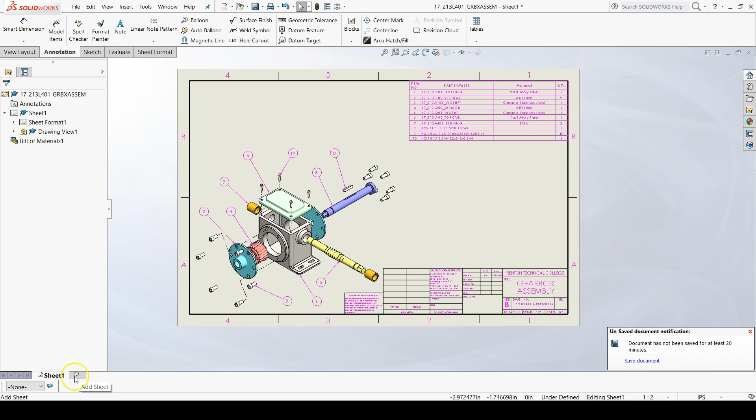Once you've done the isometric exploded view with the bill of materials and labeled everything with balloons, we can make a new sheet down here at the bottom. You say add sheet.

And then put some orthographic views of our gearbox assembly in. If you get something that looks like this, just click the refresh button to update the view palette.

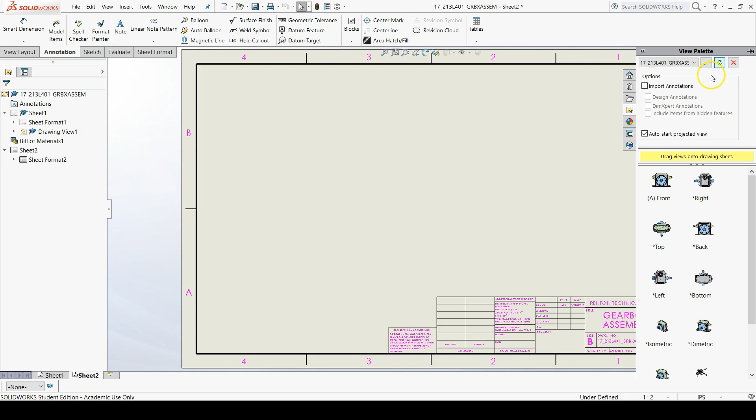Now you can throw your front view, top view, and right view into the drawing.

Now something that's very important to remember with assembly drawings is that it's very rare that you include hidden lines. So let's get rid of these hidden lines by choosing the Hidden Lines Removed display state.

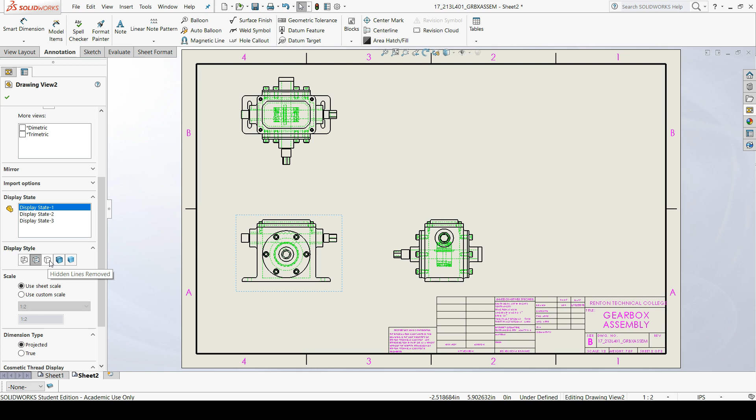Let's add a section view on the View Layout tab to the right view, going right through the middle.

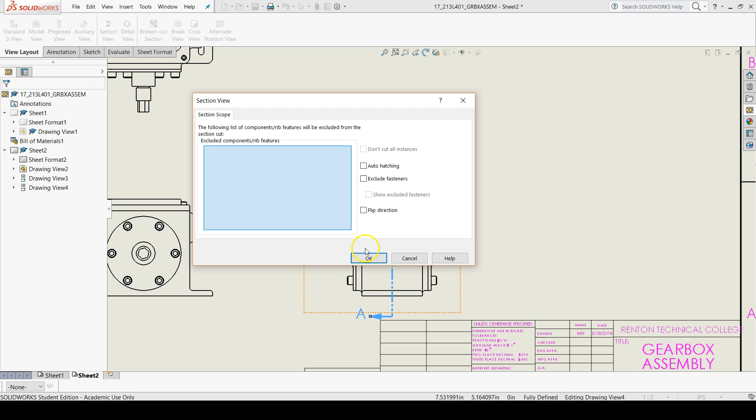Now, with assembly drawings, something comes up to where you can exclude components from the section view. We're going to want to do this in a bit, but right now we can't see all of the things that we want to exclude. So let's just make the section view first, and then we'll go back into this dialog box.

So I can move my section view over here. There's my section view icon. I'm going to move this up just a little bit. There we go.

And a couple things I'm going to do to this section view. I'm going to click in the view to get into the property manager, and I'm going to change the display style to shaded with edges.

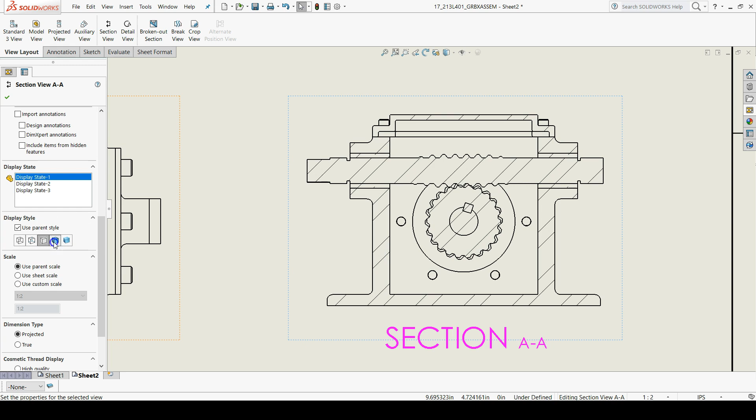I'm also going to right click in the view and then go to properties. In the properties dialog box, we can click on the section scope tab, and then now click on the worm shaft and the worm gear. We can confirm that those are our selections by looking at the name and say OK.

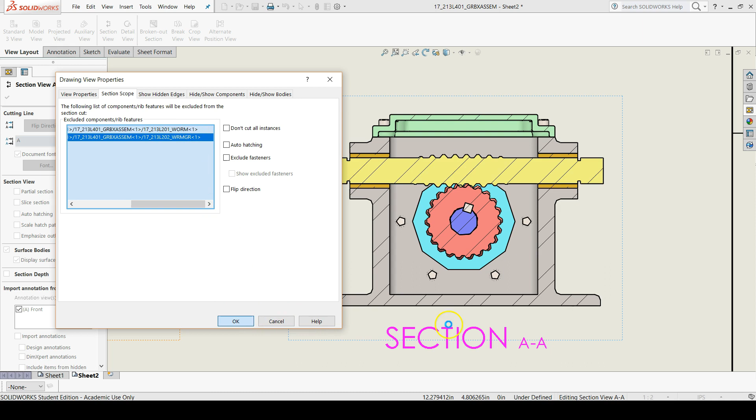And now those two components are not sectioned like the rest of the drawing. So one more thing you might notice is that this section view might look a little blotchy, a little hexagonal.

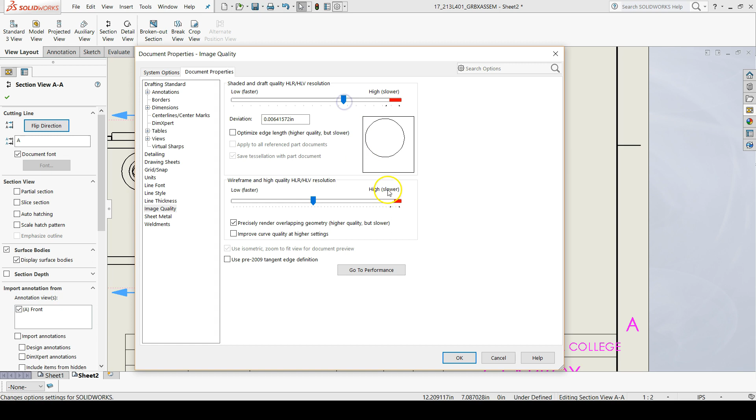So you can change the image quality of your section view by going up to Options, going to Document Properties, and then going to Image Quality. Bring this shaded and draft quality up to about 0.006 deviation. Press OK, and the image after loading should look a lot clearer.

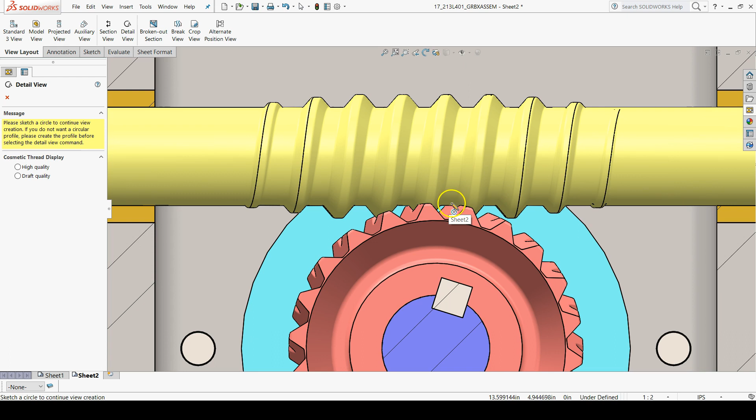Then we're going to add a detail view, which is also in the View Layout tab, right next to section view, of the gear interface. So I'm drawing my circle for my detail view, and there it is. For this, we want a 2:1 detail view.

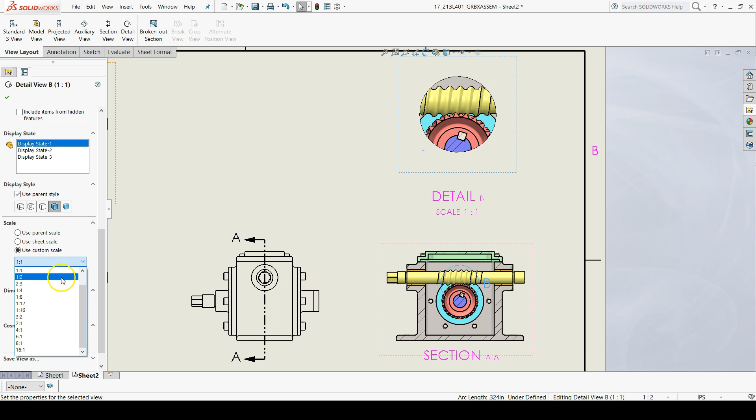By default, I think it's scaled 1:1. You can change this to scale by left-clicking inside the detail view, scrolling down in your property manager to the scale section, and then choosing 2:1. And hit confirm, and it's a lot bigger.

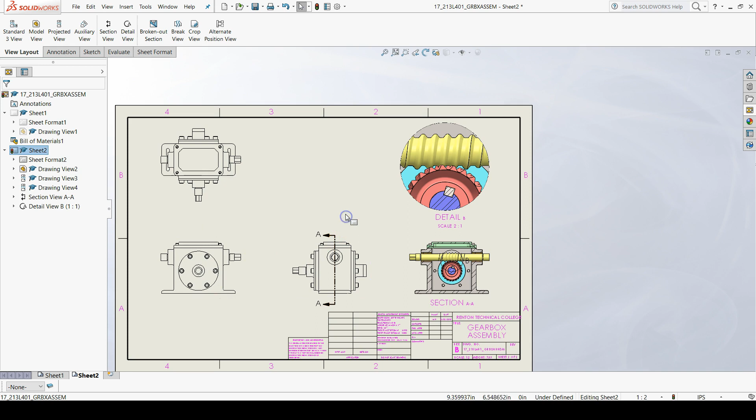I need to grab my detail view icon here. I'll move things around just a little bit, and then I want to put some dimensions on this thing that are only pertinent to the assembly of the gearbox. So to do that, I'm going to go to the Annotation tab and manually add in smart dimensions.

And you add these in just like on a regular detailed drawing. Don't worry if your dimensions look different than mine. I think... whoops, that was the wrong thing. Yeah, I did not want that. I wanted this one.

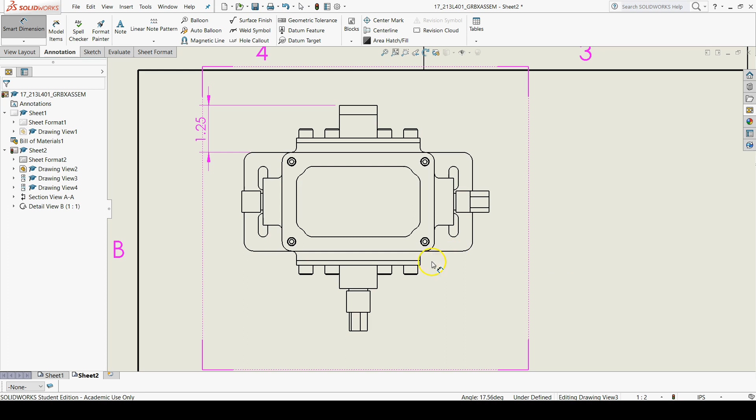But my drawing template is automatically in ANSI. That's why my dimensions are to the sides. We can also add center lines in the same way that we add all of our other center lines in detail drawings.

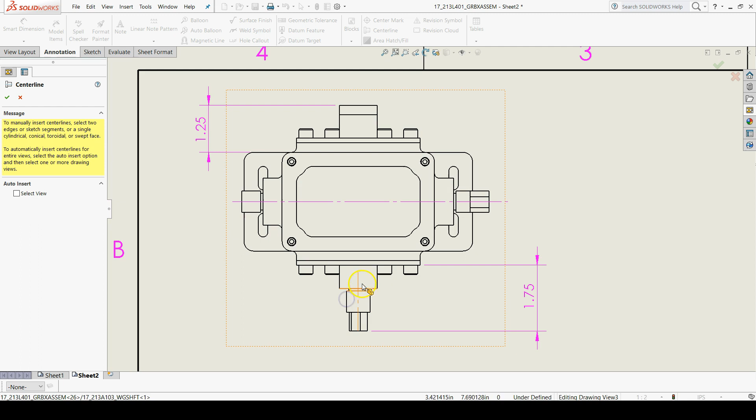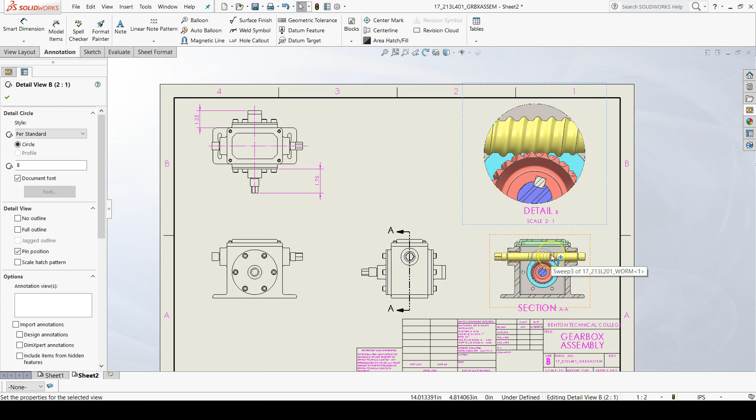And I'll leave the rest of the dimensions up to you, because I believe that is all we need. Wow, this scale is really big. I didn't think I drew it that big. I'm going to shrink it down just a little bit at the detail view level.

This is making my computer go really slow. Ugh, I can't remove it.

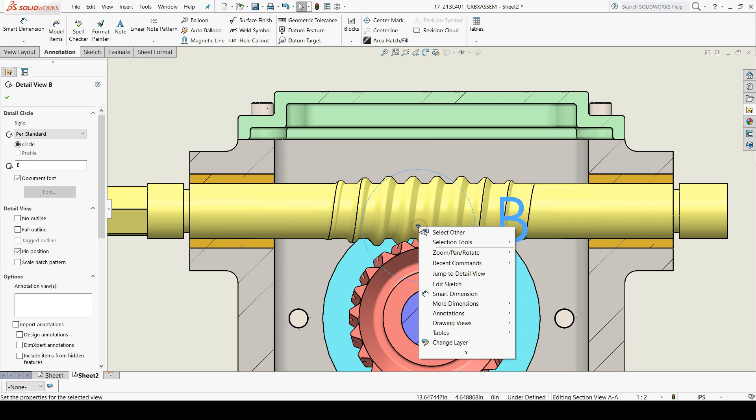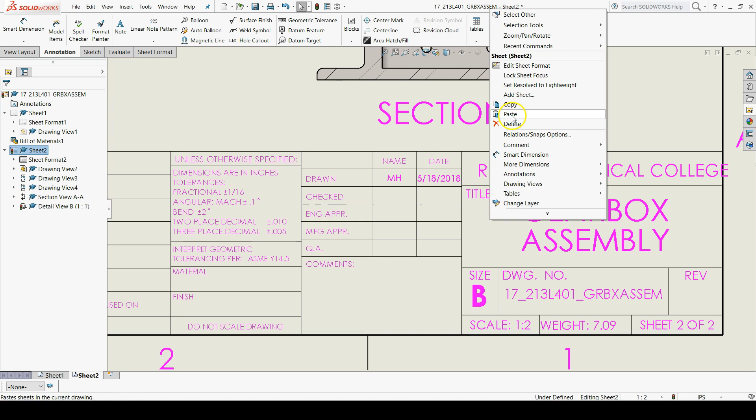That's a lot smaller. Also, don't forget to edit your border and title block. You can do that using custom properties in the assembly file and right-clicking to edit the sheet format.

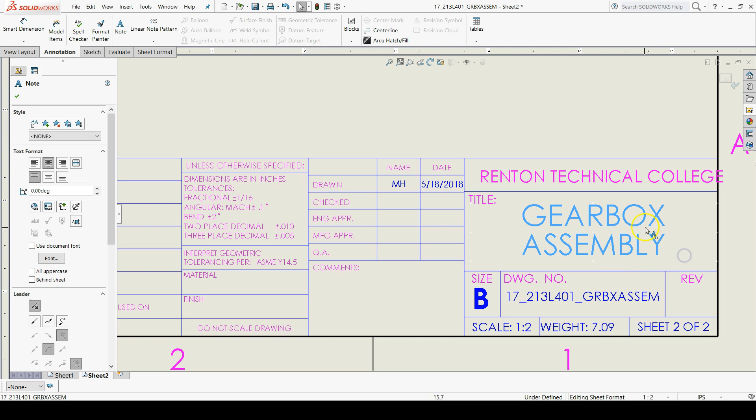Remember that there are boxes that are already in here that you can put custom properties in for, such as this one. I put in the title property in the Gearbox assembly, and I typed in the title into the assembly. Here, this is just the file name.

I have the weight here. Here I made a custom property for my initials, and then the date is attached to the drawing in custom property.

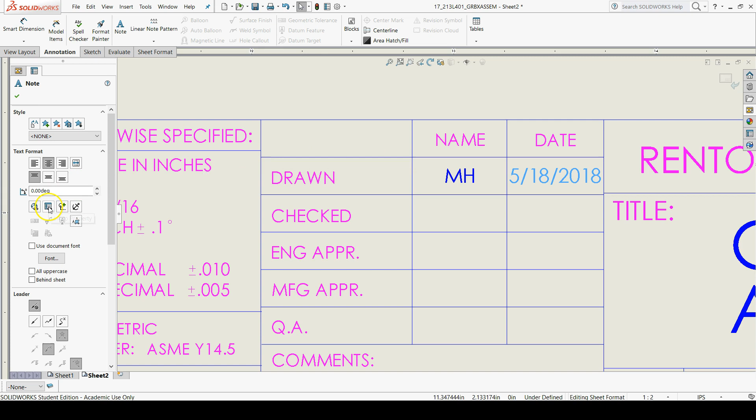I don't even have to go to Link to Property here. I can just click on the created date here, and I get my options for my date down here.

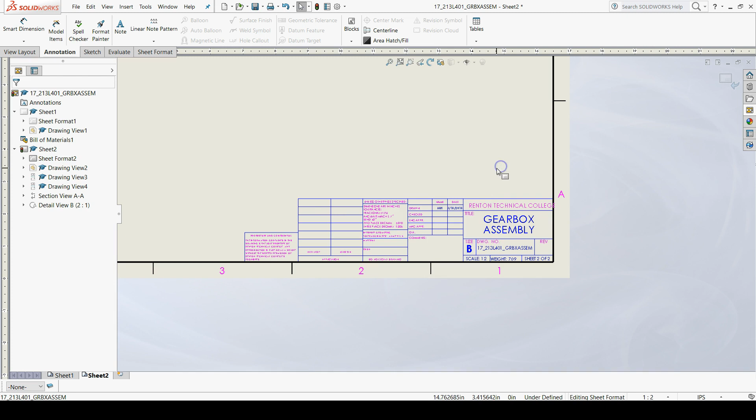So let's see if you can complete this activity, or this Gearbox assembly drawing. It's 2 sheets once this is populated with dimension.